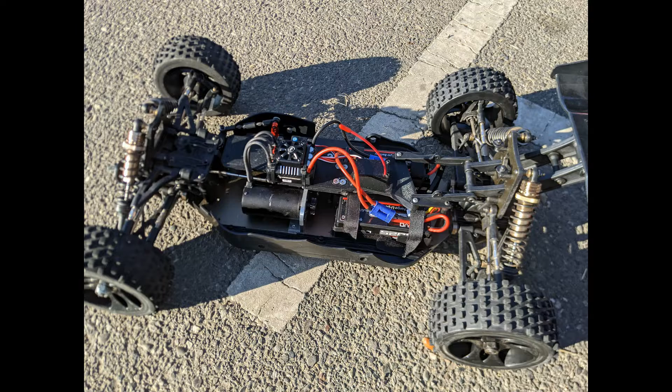I normally use SolidWorks since that is what I'm certified in, but I also use Fusion for a lot of other projects, like the Redcat Rampage XB gas to electric conversion video that's on my channel.

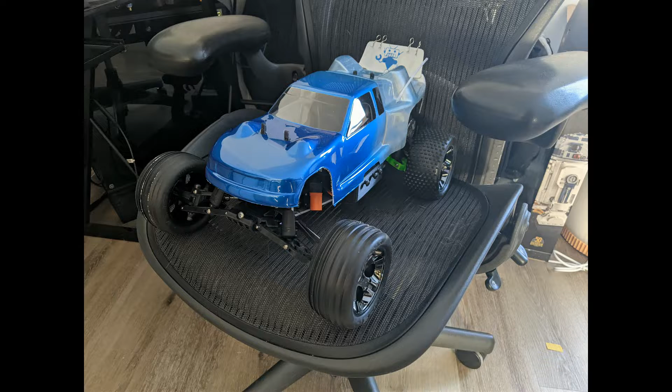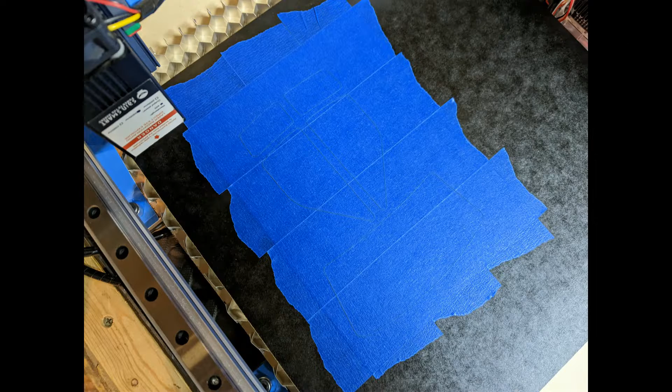Recently, I got a stadium truck body for my 3D printed RC build, but it was from the early 2000s, being a Team Losi Triple XT body, so the window masking was oxidized and no longer sticky. But I was able to scan and load the negative into Fusion, trace the lines, and export a DXF so I could laser cut some masking to use.

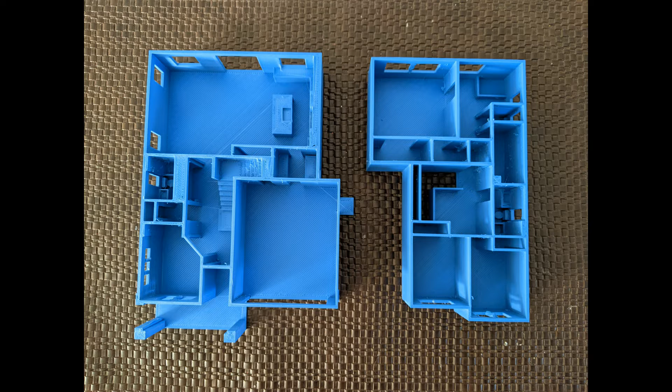For this video, we'll be staying in the design workspace. If you want to know more about the other workspaces or any selection for that matter, just mouse over it.

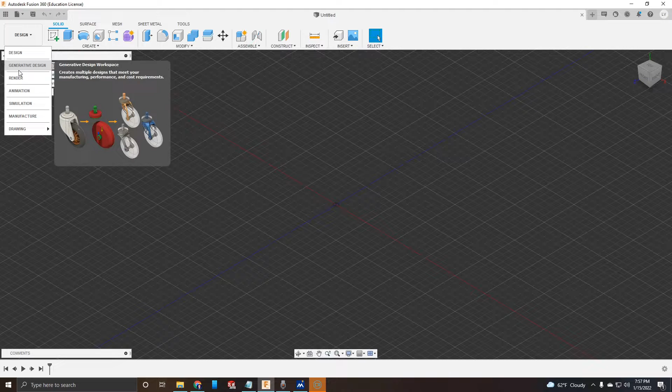For the sake of time, I will be only going over the design tools that I use as I use them for the video. If you're like me, you learn well by doing, so after watching, you can play it again as you go through the same steps I do with Fusion 360 open on your computer.

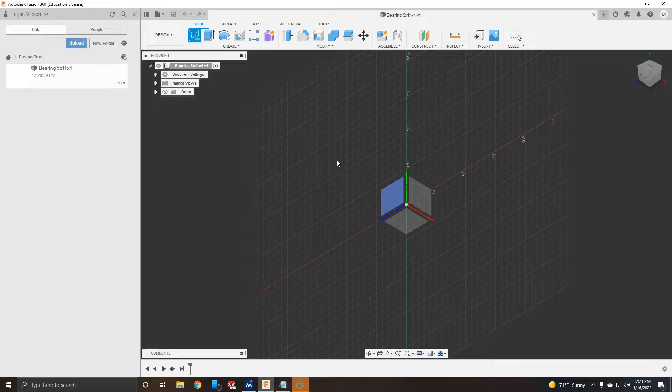And you can press Tab after the first one to keep the circle operation selected. Otherwise, you'll have to select the circle again.

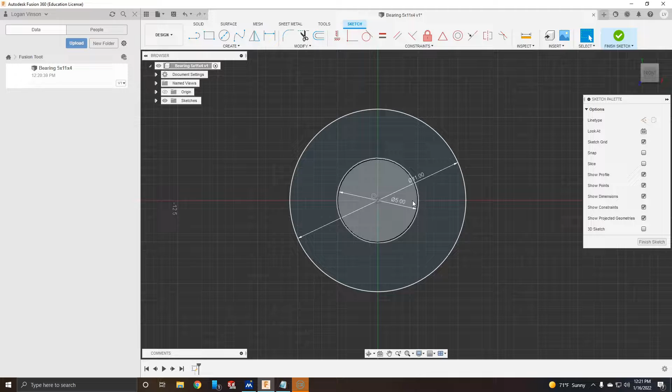Then we make sure the sketch is fully defined by giving it relations and turning the lines from blue to black, or white in this case if you're using a dark background. We see that since we selected the origin for both starting points, it gives a concentric relation automatically, shown by this little symbol right here. And then we finish the sketch.

Now we will hit extrude. Select this face and extrude it by typing the amount or by pushing or pulling the arrow, and you want to get it to the bearing's thickness of 4mm.

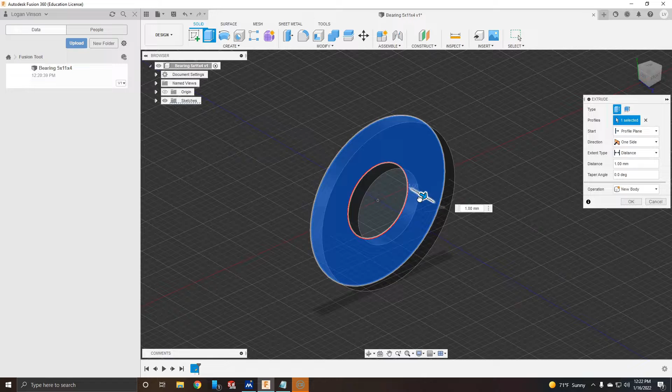We will select the profile plane, one side, distance, whole length value, and the operation as a new body. You can use that as is if you're just trying to make a quick reference part in an assembly, but let's make it look a little more like a bearing.

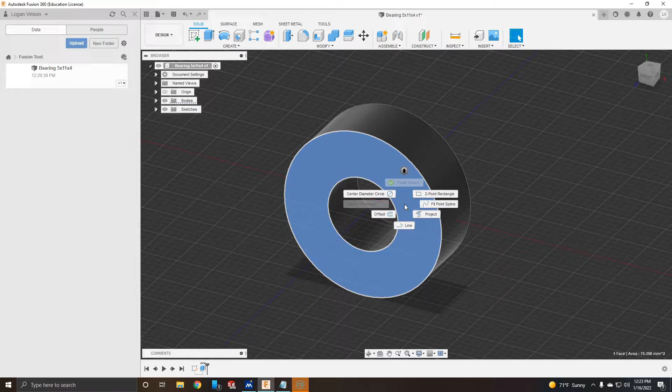We are going to be selecting the face, hit Create Sketch, make 2 concentric circles with the inner diameter and outer diameter of the bearing shielding, and then extrude.

Then we will select the profile plane, one side, and a distance of negative 0.1 millimeters, and have it as a cut operation. To have it on the other side, select the feature from the timeline on the bottom, go to Create, then Mirror, and select the mirroring plane as the front plane, and then OK.

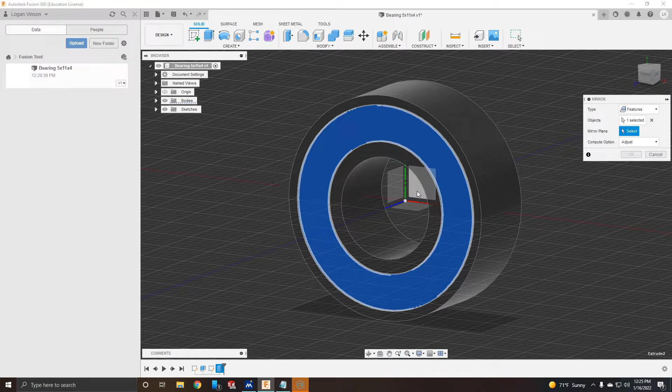And now we can see that the operation was mirrored.

Now we can make those little chamfers on the ID and OD. Select Chamfer under Modify, select the faces to chamfer, make it 0.2 millimeters, and then hit OK.

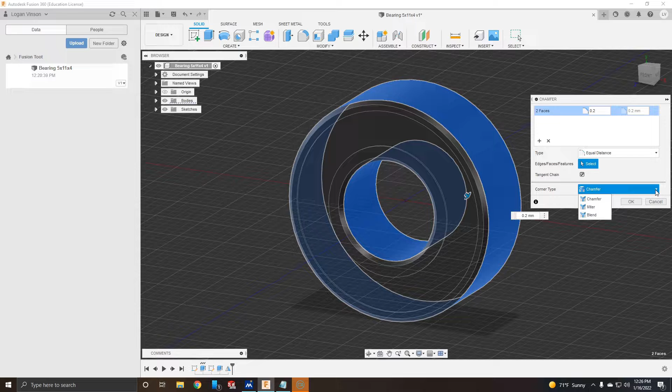If we wanted to change the appearance, we change the material of the body to steel carbon, and right-click on the part and select Appearance.

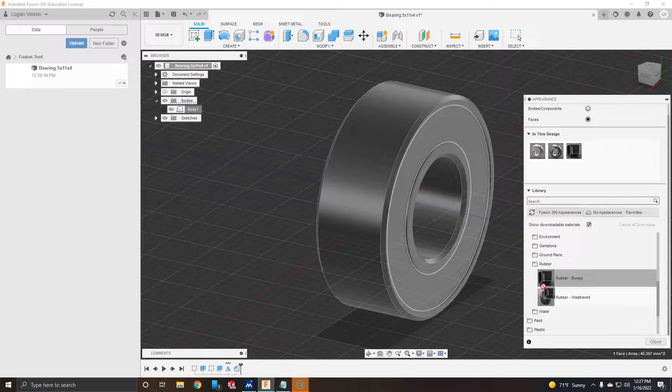Select Apply to Faces, and then go down to Other, Rubber, then download and drag it onto the face, and do it for the other side too.

Now that the bearing is complete, we will turn it into a component. So right-click on the bodies or group of bodies, select Create Component, and you're done.

Now we will do this for each of the components in case you want to use them for other projects. Then you'll have the individual parts already modeled and available.

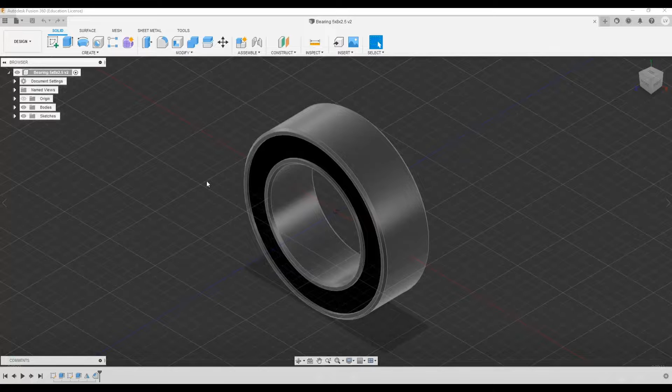Now let's use what we learned to make a 5 by 8 by 2.5 millimeter bearing using the same exact procedures.

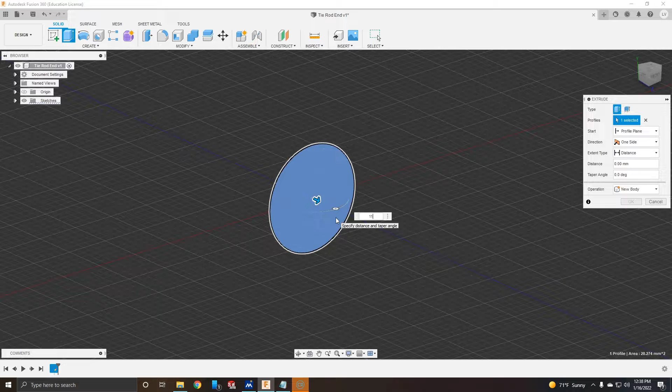For a tie rod end, in the front plane, we will extrude a cylinder, and then an inscribed polygon, meaning the diameter is based on the corners instead of the flats. Then we'll align that to the extruded cylinder, and set the horizontal constraint to fully define it.

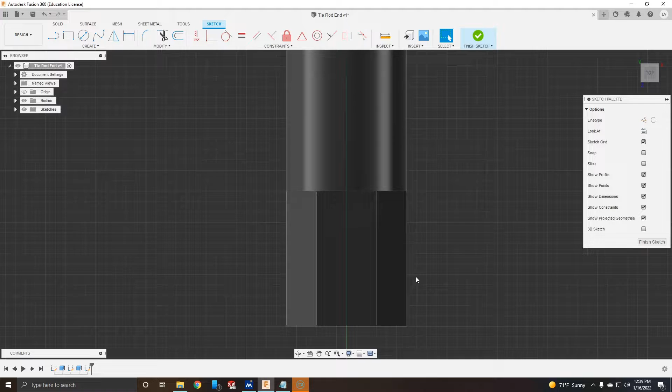Next is the rounded end. We're going to be making a sketch on the top plane. Grab these 2 edges and project them onto our sketch so we can reference them and turn them into construction lines. We can do that through the sketch palette on the right.

Then we will put in a 3-point arc and use the constraints to make sure that the arc is tangent to the 2 lines, and close out the area to cut revolve, and make a center line through the origin of our axis of rotation.

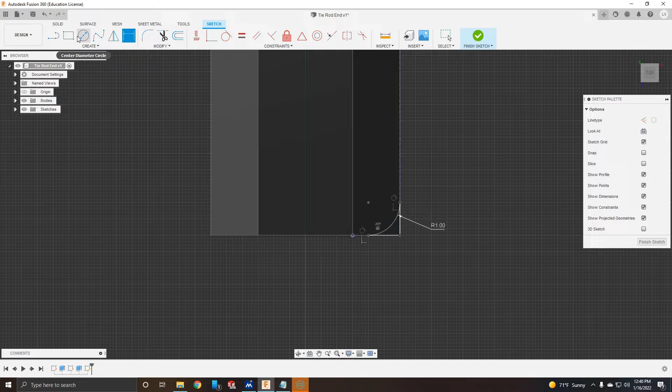Without exiting our sketch, we could jump over to Solid and then Revolve, and it will automatically use the closed area and our center line to revolve a cut through the part.

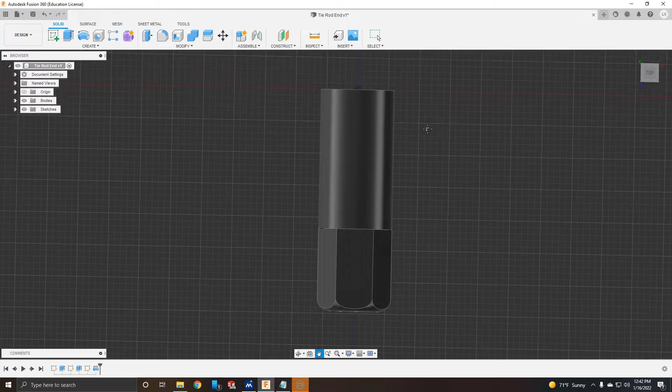Now we make the captured ball section. We'll do the outer diameter vertically from the origin, and then place a construction line from the origin to the topmost edge, and then we'll set the measured values.

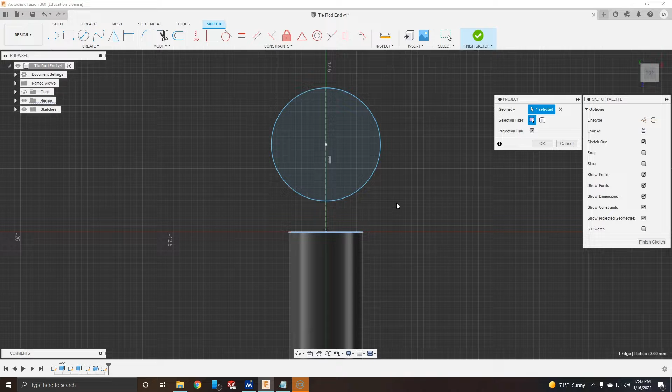Then we project the top line as solid, and make these lines on either side tangent to our outer diameter, and then trim these lower arcs.

Make sure the sketch is fully defined after trimming, and extrude it as a join operation.

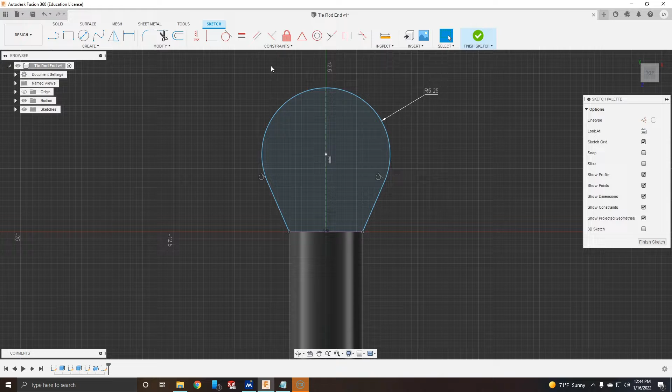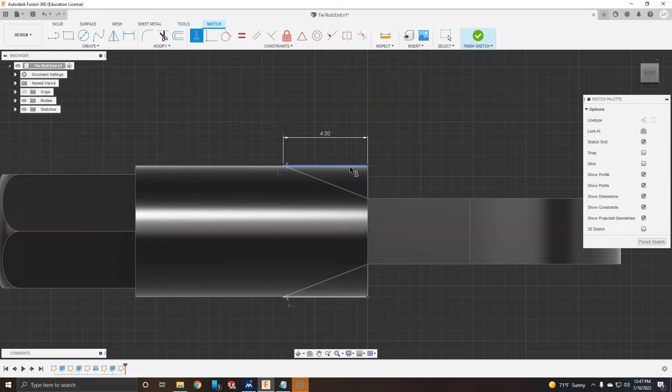Next sketch is on the right plane. We're going to be projecting these 2 lines and make a couple right triangles. Then extrude cut symmetrically through all.

To get rid of these protruding corners, we will make a sketch on the top plane, project this line as a construction line, and make it a right triangle.

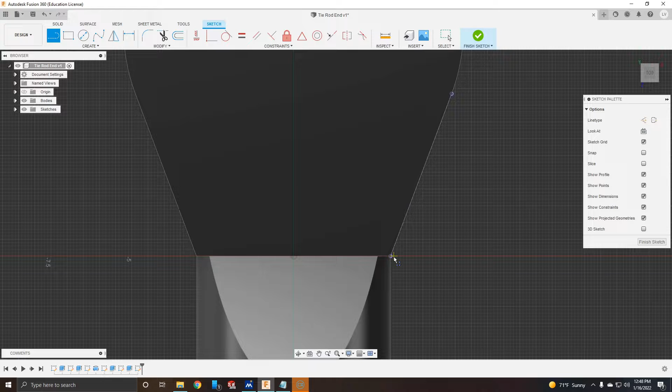If you really want to be fancy, you can use functions of other measurements for more parametric modeling. Put our center line through the origin and revolve cut through all.

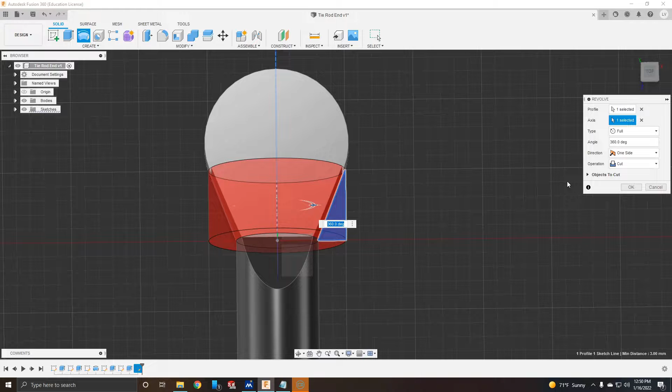But since we are going to be doing the same operation for the next feature, we can go back into the sketch that we just came out of and put in the inner spherical cutout. Let's project this arc as a construction line and make a semicircle concentric to that.

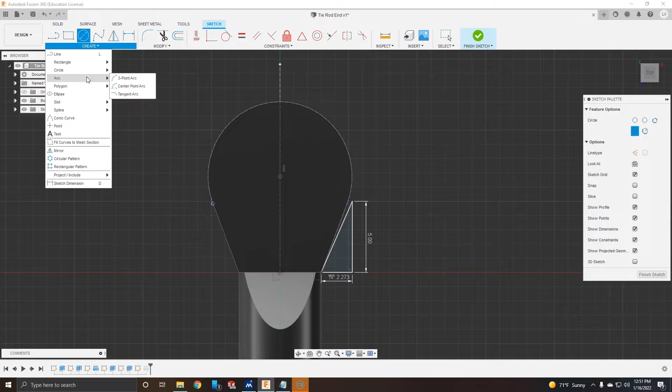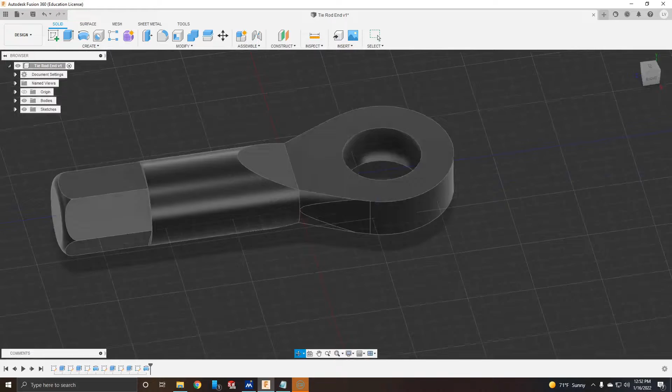Make it slightly larger than our ball diameter, and if needed, we can go back into the revolve feature in the timeline and select this new geometry if it's not already selected.

Now, don't forget the hole in the bottom. Then we can edit the appearance and turn this body into a component.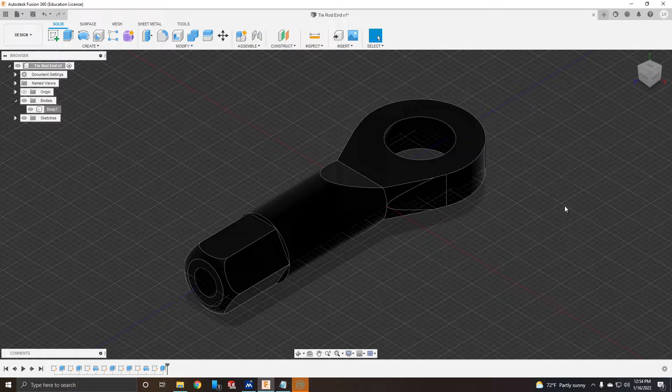Instead of making a new part file for the ball section, we can do it right in the same file, since they come together as a unit.

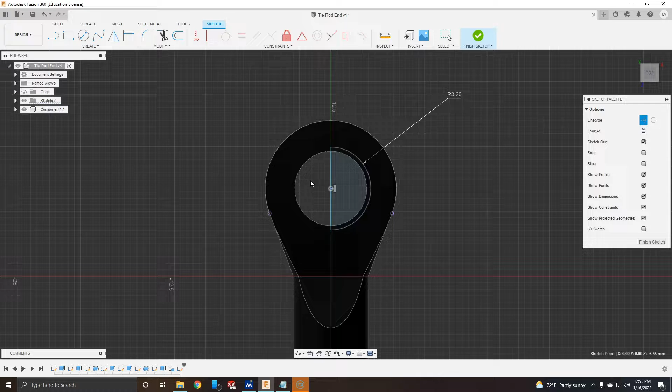So let's make a new body, and we'll do a semicircle concentric to this outer contour and have it revolved around the center line. Ensure that it's fully defined, and then hit revolve.

Now we can go into one of our previous sketches and turn the last one visible. And we'll use this center point to make the next extruded symmetric join operation, and then the extruded cut operation through all.

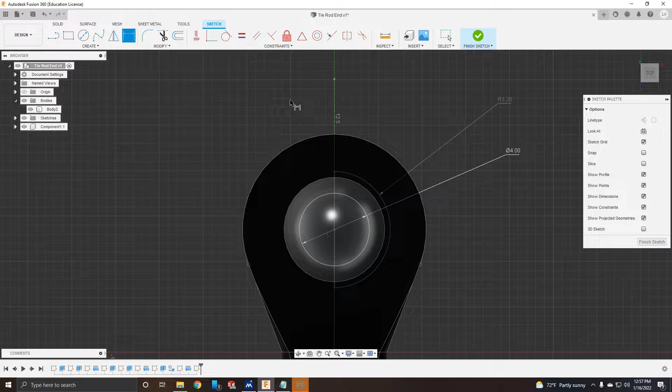Let's change the material and turn it into a component.

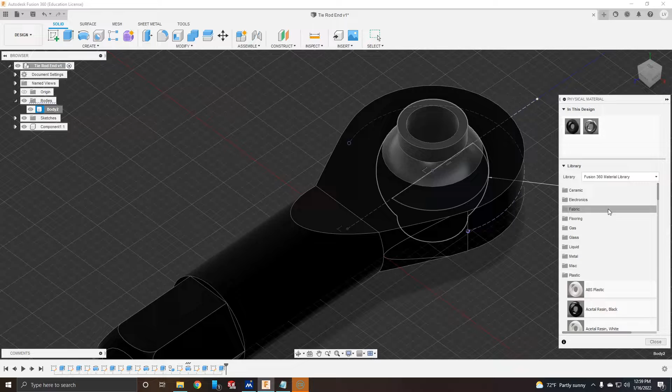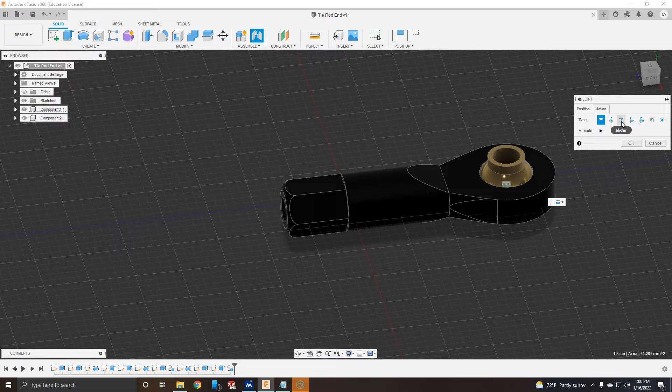Now here's a little challenge for you. I want you to pause the video and figure out how to make this tie rod. You don't need to model it. Just think of what the procedure would be to model it. What steps would you use? How many features did you use?

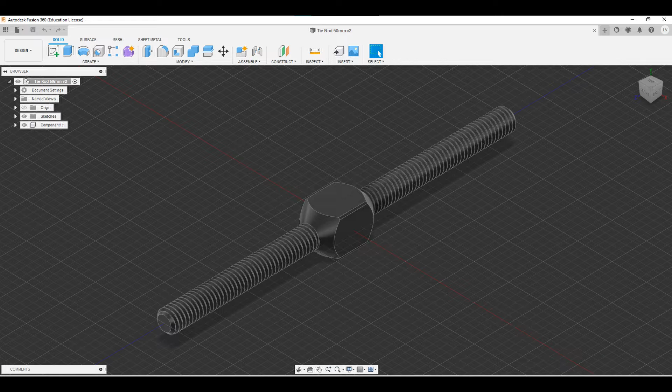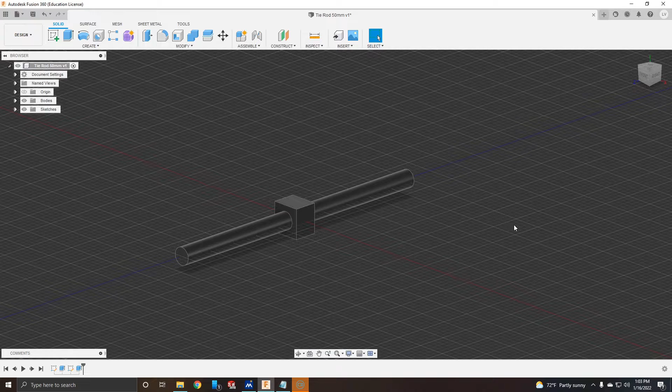Now let's go through and see if I did the same thing you would do. First, I'll make the 5mm box profile extrusion. And then the extruded shafts. I then chamfered the box profile corners and made a large chamfer for the transition area.

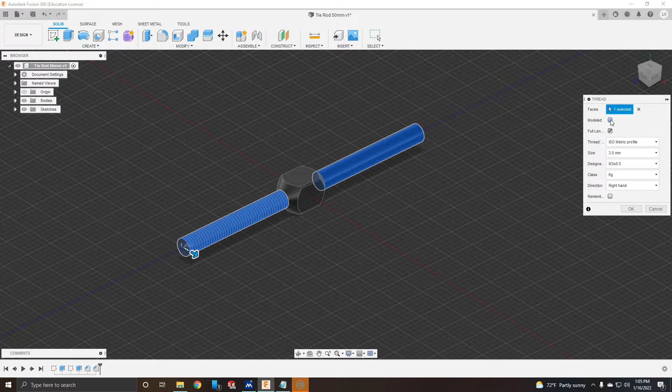After that, I cut the right-handed threads using the thread tool under Create, and then the left-handed threads on the other side. You can select Modeled, but if you have a lower powered PC, then you can leave it unselected to have mock threads on the surface. This is especially useful if you have large assemblies, as every facet of the threads can slow down your system.

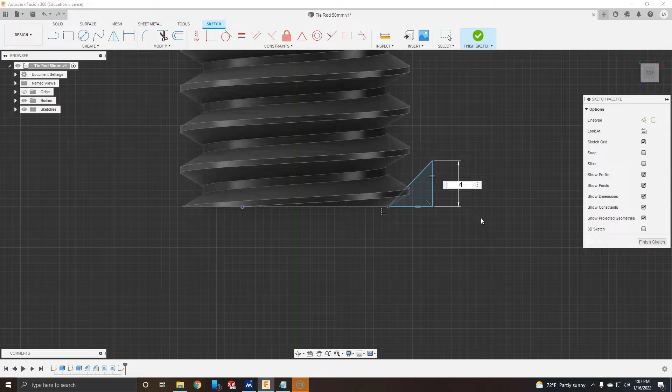And here I'm just making a revolve cut to chamfer the ends. If you make the revolve cut before you do the threads, the threads will stop before the chamfer starts, and we don't want that. We want the chamfer to go through the threads, so that's what we're going to cut away.

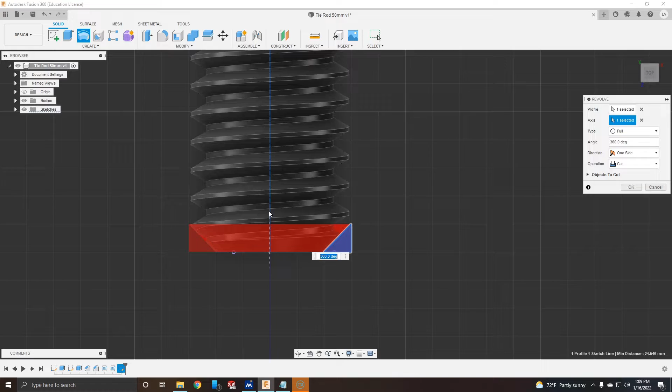Now that we have modeled the off-the-shelf components, it's time to start our custom parts to integrate them. We're going to make a new file as our assembly to reference our other parts. Drag and drop the other parts into this build space, and we can do this for multiple copies of the same part.

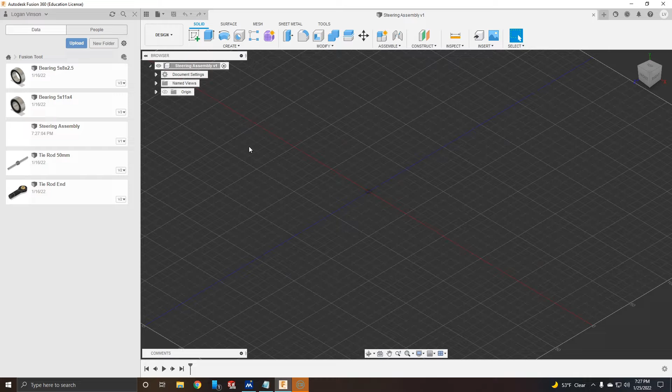It's now time to start making relations and constraints between our parts, and this will hold them together in a way that allows us to build around.

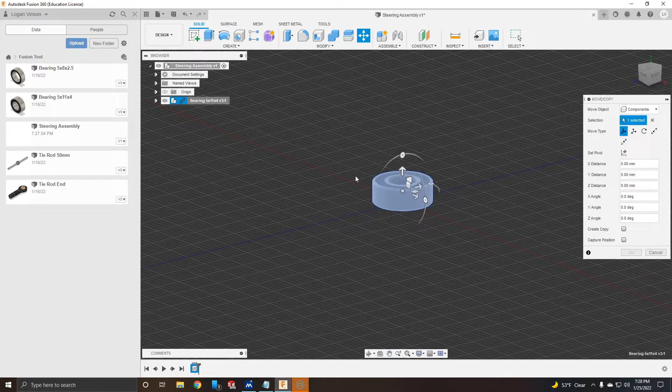Let's drag and drop the 5x11x4 bearing, then right-click on the component and select Move Copy. Make sure the Create Copy box is selected. Now we'll rotate and reposition the copy, and then we'll do that 2 more times.

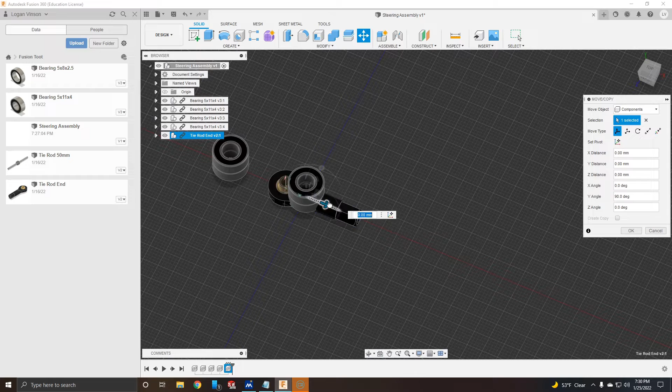Now bring in the tie rod ends and the tie rods, and position them how you might assemble them in the real world.

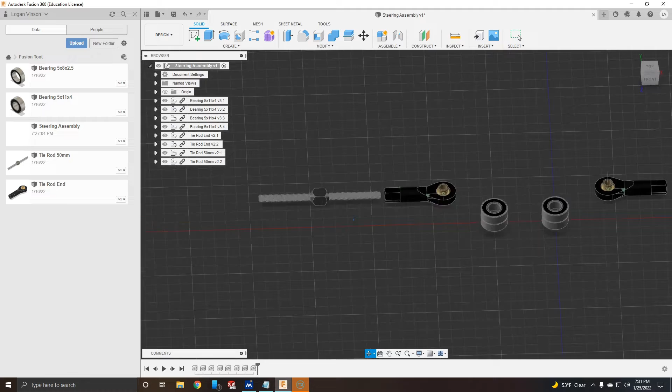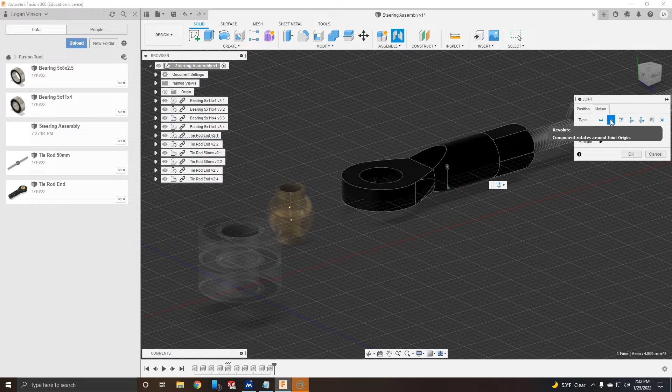We will then select the concentric faces or edges, and instead of making them rigid, we will make them revolute so that they can rotate around each other. I do this since linkages in real life don't have to be locked in alignment. They can be positioned rotationally how best they will move. We can further constrain their rotational motion later with more joints with other parts. We will also see later why it is important to select the components in the correct order so that the correct part revolves around the other.

Now go ahead and mate up the rest of the components.

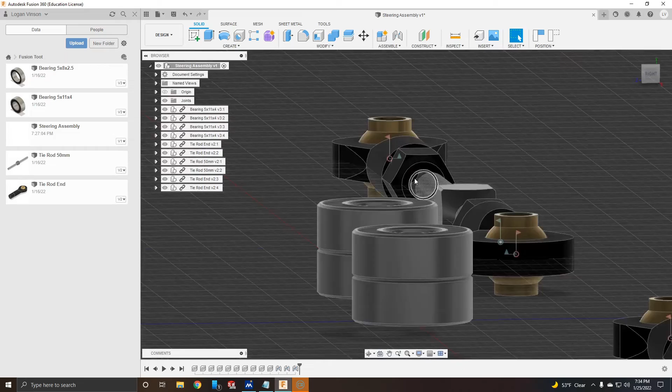Next, we're going to make a gap between our bearings so that we can have a 3D printed ledge separating the bearings. This will give us space to make the steering linkages.

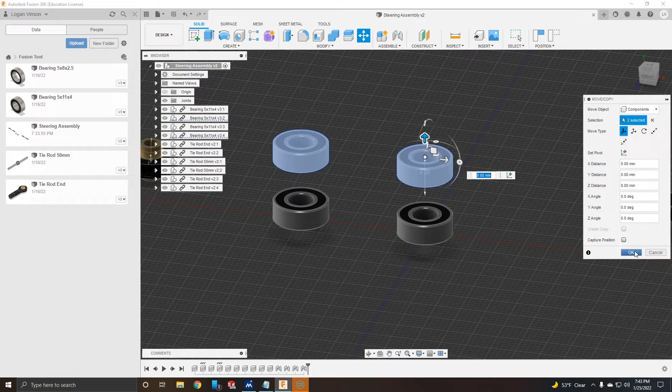Let's start a new part with 2 concentric circles, one for the outer diameter and the other for the bearing outer diameter clearance.

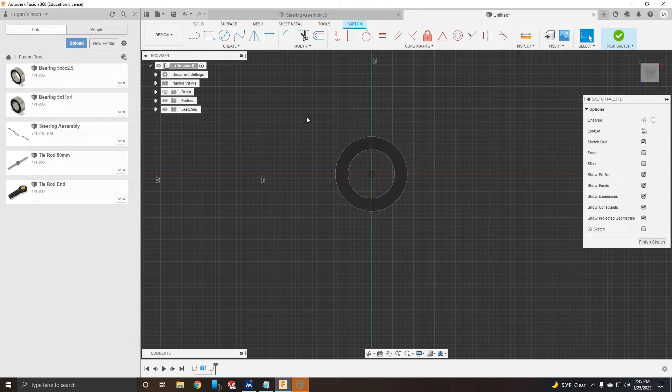We will then model the separating ledge by projecting our inner diameter and making the smaller concentric circle inside of that. Then we'll join extrude offset by the width of the bearing, which is 4 millimeters, and offset to the other face minus 4 millimeters for space for the other bearing.

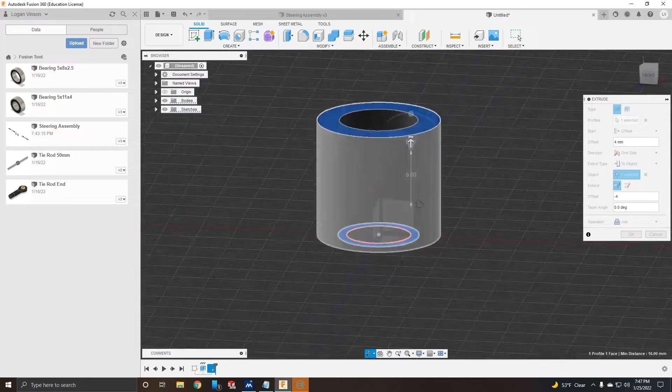Let's save this part file and import the draft into our assembly. Then we'll give it a revolute joint around the bearings.

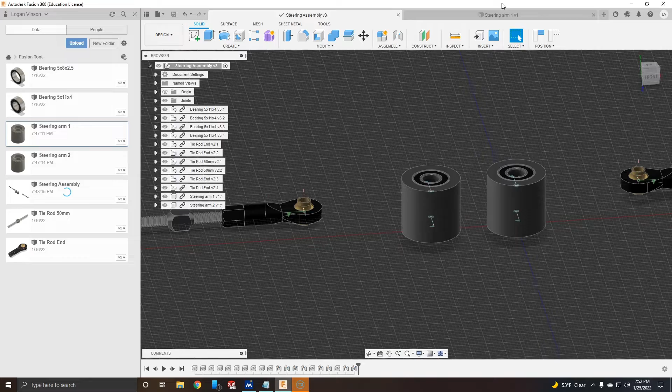Now we're going to go back into the draft part and give it linkage arms to help turn the rotary motion into linear motion. This is just an extrude on a couple of concentric circles with the inner being 2.5 millimeters, which is also a good size for screwing an M3 size fastener into a 3D printed part without having to tap holes.

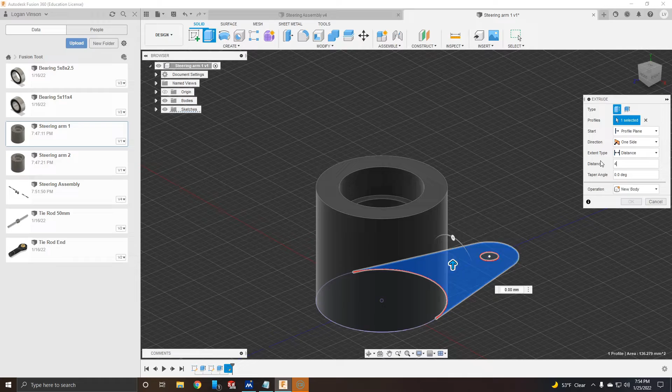And then we will join it to the projected outer diameter line of the already extruded part.

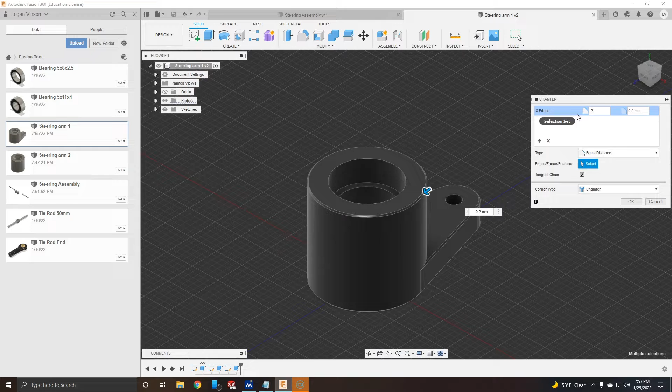We can then go back into the assembly and see how it looks, making little changes where we see fit. Then we can clean up the look with a couple of chamfers and then turn it into a component and select the material properties.

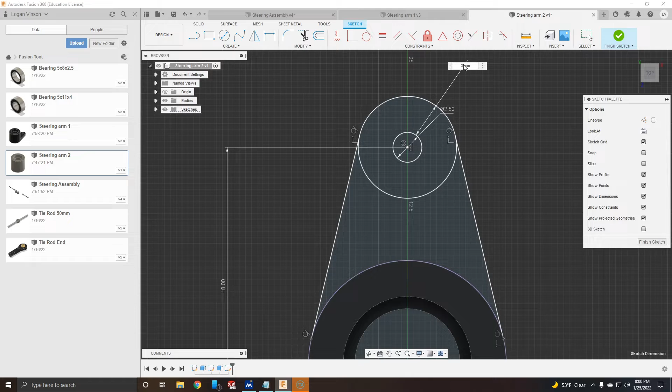Then it's time to make the complementary steering arm, but with another protrusion 90 degrees offset, so we can turn linear motion in the y-axis to linear motion in the x-axis.

Now we can clean it just like the other one with some chamfers and adjusting the material properties.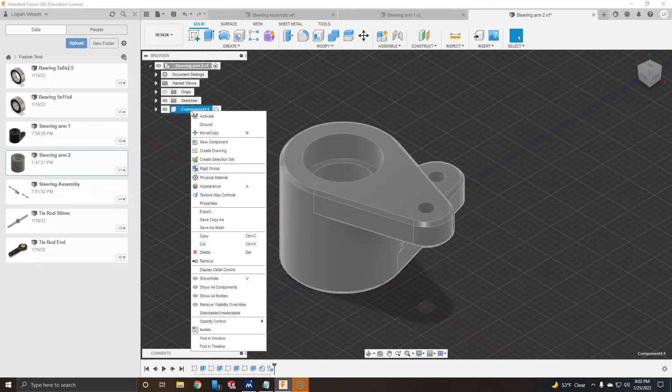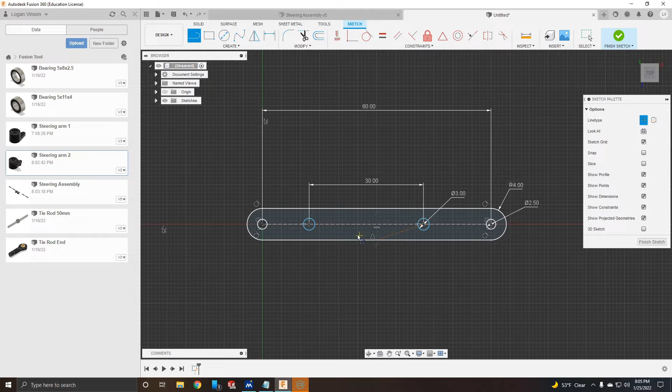Next, we'll update our assembly and start modeling the connecting linkage. This just has to be a bar with 4 holes: 2 inner at M3 fastener clearance, and 2 outer with our M3 threading diameter of 2.5 millimeters.

Now we can import it into our assembly and start making the relations for joints between the parts.

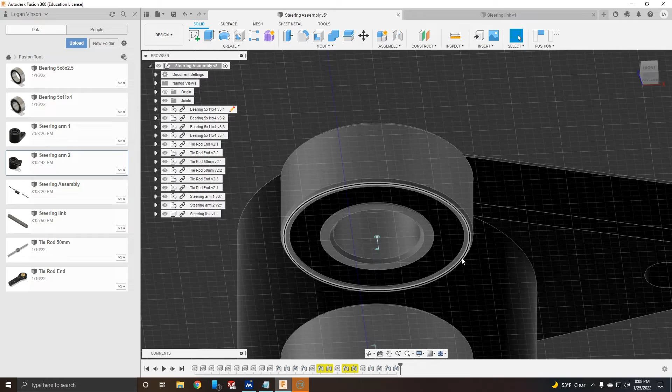Here I am just making the base to mount everything to, kind of like a mock chassis plate.

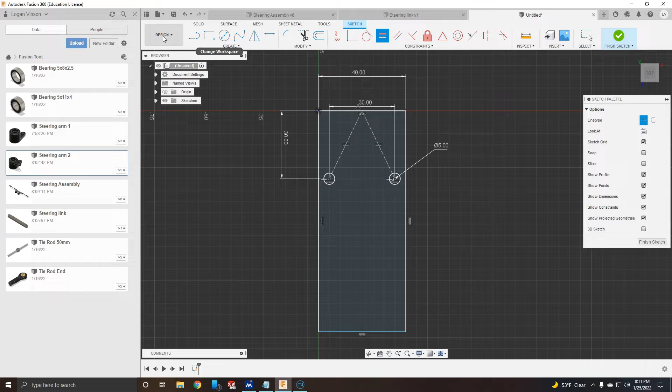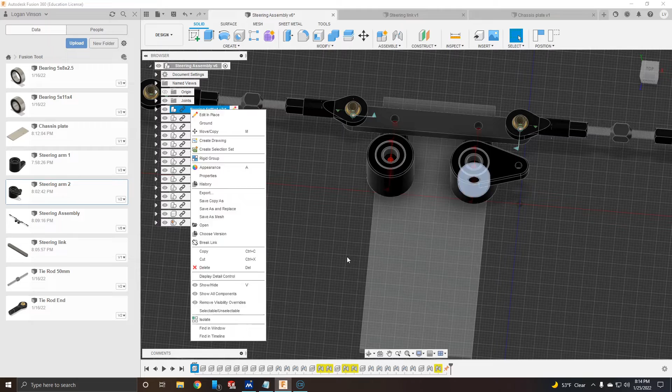Due to me being mostly a SolidWorks user, I made a few mistakes with the joints here. It's actually really important to pay attention to which part spins around the other. Otherwise, you'll have opposing forces trying to drive each other, and it really doesn't like that.

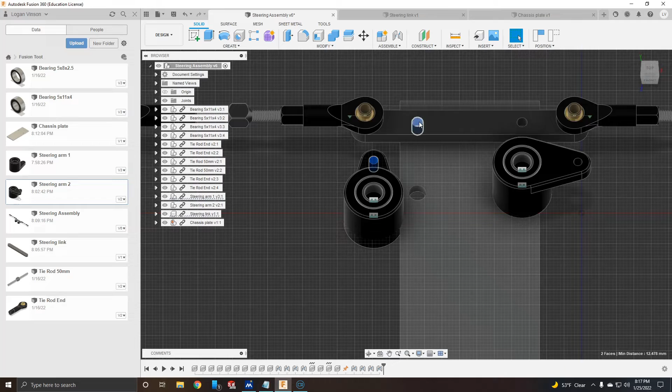It's actually best to start with the driving force. In this case, it's where the servo starts, and then work your way down, having the downstream parts doing the motion around the upstream parts. And if it actually doesn't do that, then just exit and reselect the parts again in the correct order.

I took a little time to reselect the parts in the way I just described, and this is the result. I can now control the linkages by turning just this one part.

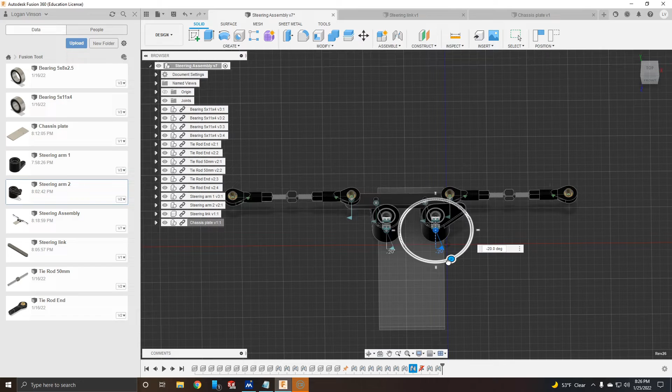If you want, you can continue making more of the suspension components and continue the joints down the line. Let me know if you want me to continue this in the next video, or I can just move on to a different topic.

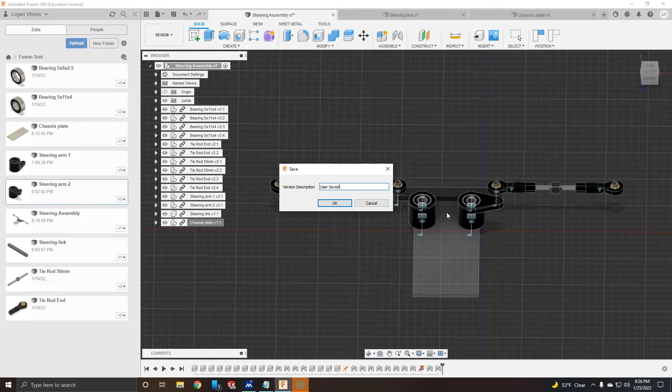The next thing I want to touch on is exporting for manufacturing. Did you notice that the linkage rod is a simple extruded 2D profile?

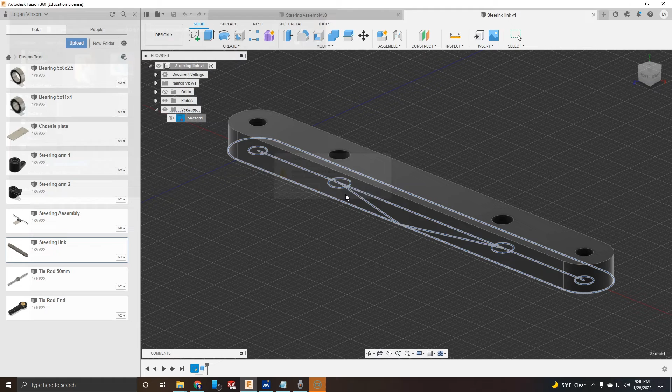This is on purpose, because now I can select the sketch used for the extrude and export it to a DXF. Then I can upload that into a CNC laser, CNC router, or even just send it off to a service like Send Cut Send and have it made out of 6061 aluminum.

Making this video took a bit of time since I have a day job and a family, but it was a ton of fun. Let me know if you have any other topics that you'd like me to expand on. I just love 3D modeling and making parts out of my designs, and I look forward to sharing with you in the next one. Take care.